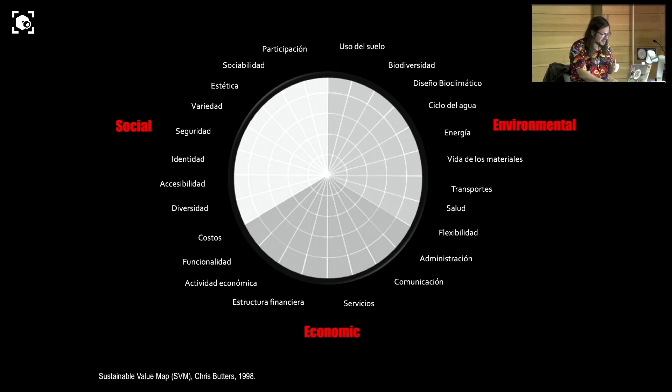As we know, sustainability has been defined for the last 30 years - if you look at a Chris Butters value map from 1998, it's complex, as we know, with three main components: the economical, the social, and the environmental. But I think at the end, what we're trying to seek these days is how we can pursue integrated visions.

And here are some important thinkers. I don't know if you have heard about Janine Benyus and the Biomimicry Institute. She points out 10 rules in nature, considering patterns that are very important. And if we look at how nature has been evolving and how things are interconnected, that's something that actually overlaps many other logics that are important to address.

Or if we go to, for example, Donella Meadows' beautiful book, Thinking in Systems, she talks about 12 leverage points on sustainability. Probably the first steps are to get to know the materials, the processes, the design, but in the end, the intent, the values, the conceptual framework behind a system is what really matters, what we need to understand.

And I really like this phrase by Mr. Fuller, which points out the importance of cooperation without causing harm or disadvantage to anyone. There is an obsession, almost, in many countries to certify sustainability. I don't want to go in depth on that, but there is this amazing initiative, I think based here in the US, about the Living Building Challenge.

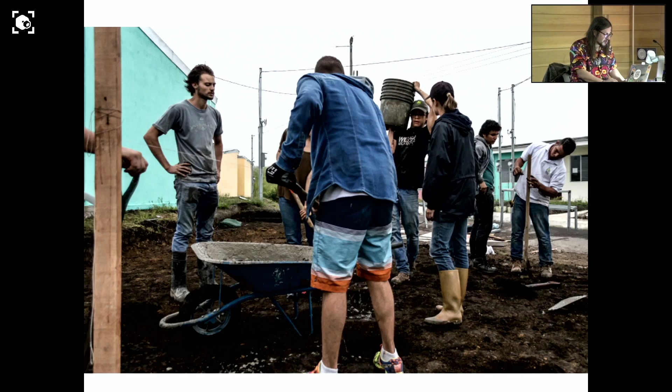Before showing you some examples, I'd like to acknowledge the importance of local intelligence. From my Costa Rican point of view, there are some silly things that happen. For example, there's a huge movement back in Costa Rica about wellness—this is probably good fashion in a way. There's a lot of local effort, people coming from abroad to develop healthy lifestyles, diets, and things.

But we have one of the five blue zones in the world. Have you heard about it? There are only five blue zones. There's a really nice Netflix documentary about it. The people who live in the blue zone in Costa Rica are in a rural area where they have strong social relations. The food they eat is healthy food they grow in their gardens. They do physical exercise, they never retire, they're always close to each other. This is probably one of the reasons they live more than 90 years, and our average life expectancy in Costa Rica is very high.

With a really low income, we have achieved this type of life quality. So it's not about how much you earn or all the things you have—it's about rethinking life quality. So the question is: we're importing all these trends, but are we listening to these populations and learning from their wisdom?

Also, we're talking about circular economies. We want to import many technologies from Germany, from Europe, even from the US context. But have we spoken to the informal settlements? They've been struggling for years, and they have amazing on-site programs on how to recycle and reuse materials. They have a lot of lessons to teach us.

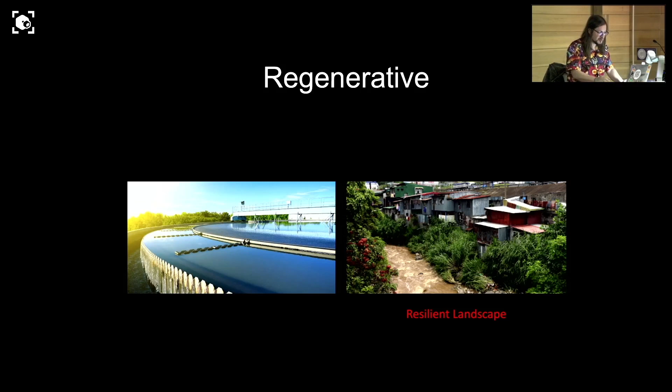Or we want to incorporate this smart cities concept just because it's a business model for somebody else, but probably the most important part is not about smart cities, but smart citizens. I'm not saying I'm against technology, but there's something more important about the human experience and being smart within a social context.

So in practice, I want to show you some examples of what we do.

So there are some projects that I think are milestones for us, and some of them are related with community spaces. Probably one of the first projects, I got contacted by Holcim Foundation to design a manual for nurseries in Costa Rica for low-income communities and rural areas.

So we developed this book that generated guidelines for nurseries. I think the important part was how we could put all the regulations into one single document, making it responsive to our climatic constraints and space use. We came out with this set of guidelines, and we got commissioned to develop some of these projects.

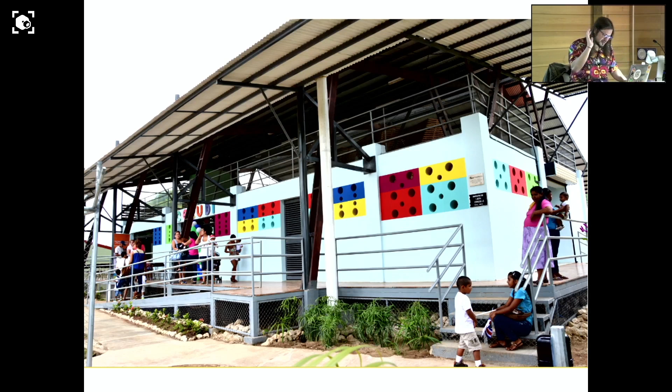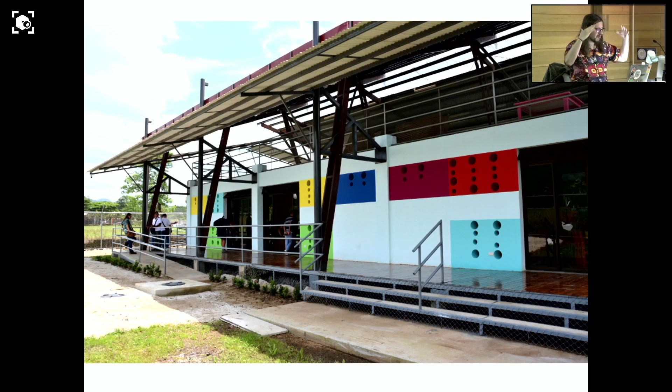This was back probably in 2011, 2010. The idea of these projects was really simple: to have a first level, multi-purpose, interconnected spaces for the nurseries. But on top of it, we have this buffer space, like an elevated roof, that generates a thermal buffer and has a multifunctional space on top of it.

All the internal partitions are movable, so everything can get interconnected for that instance. This project was really important for us because it was our first approach to understand, with the Holcim Foundation and the local government, how these pieces of infrastructure could be multi-use, not only for a nursery, but as an opportunity for different possibilities of spatial program and use.

That's something we tried to address with some of these projects we constructed a few years ago. As you see, they're really simple, just the base, a multifunctional base with this big roof, and that's it.

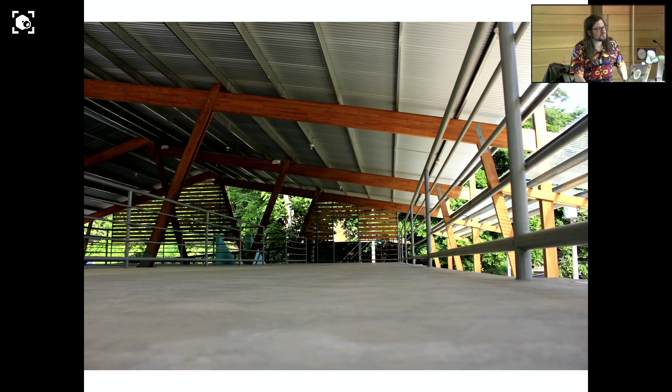I used to have a history professor who said that the history of architecture in the tropics is the history of the roof. So basically, if you have a very well-designed roof, you can put anything you want underneath. More or less, this is the core aspect of it.

After this set of projects, we got really deep into participation. And when I talk about participation, I'm saying it in a broader extent.

Here, there is an experience that I developed in Lowell, Massachusetts with the refugee Cambodian community. Also with some Mexicans in Oaxtepec, Mexican campesinos - farmers - in Oaxtepec, Mexico. And also with some community organized groups.

And when we were in the pandemic, we had to struggle and juggle how we could do participation without being there. So we've explored many formats and many places on how to work this.

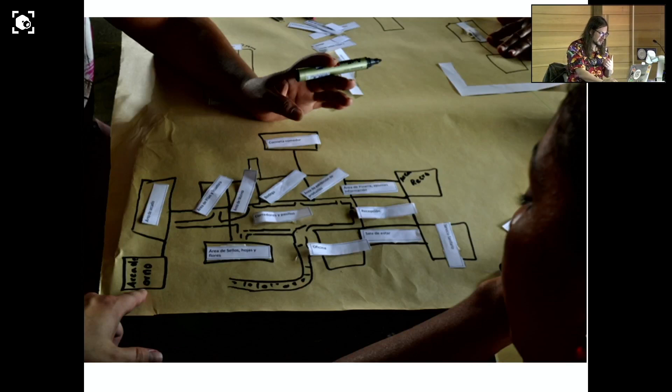I think the important part is how we craft these experiences, not as a recipe, but as a series of moments - how to listen, how to understand on site the communities, listen to their voices, try to raise those voices, have critical conversations about what aspects we need for the particular project we're trying to put together, and then how we can validate these ideas.

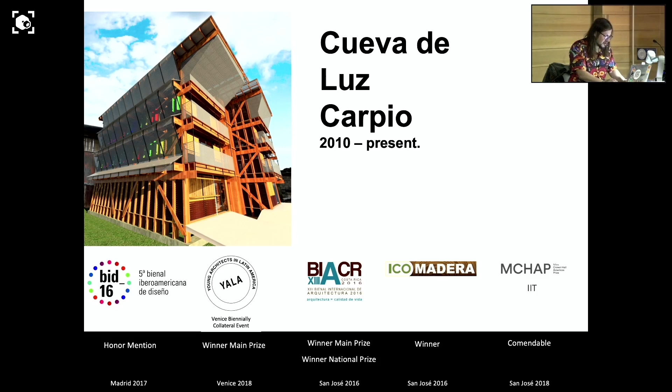This is probably one of our most important projects. It's called Cueva de Luz, in La Carpio. This is located in San Jose's biggest informal settlement. I'm going to show you a short video about it.

Informal settlement - we're speaking about more than 50,000 inhabitants. Almost 13 years ago, we spoke to these two amazing women, Alicia Avilés, who is the community leader, and Maria Estela, the leader of the NGO, which is based on a system of art education for social inclusion.

We spoke to them years ago, knocking on the door - how can we help? How can we be helpful? And they presented to us the necessity of having this community space.

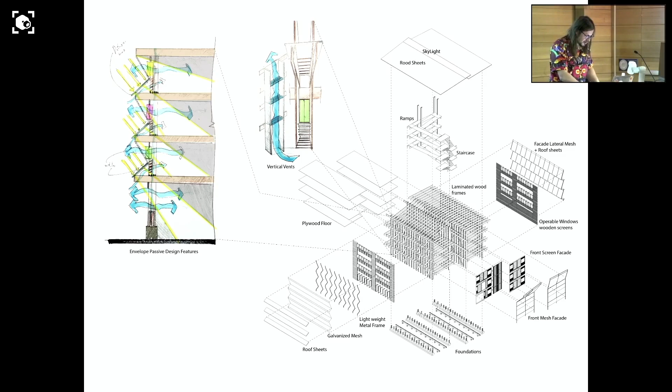And it's a very simple program. It's a four-storey timber construction, the biggest in the region. We first constructed one volume and then the other one because everything was related to a fundraise campaign, so we couldn't do all at once. Here are some images about how to think a piece of infrastructure that could be easily installed in a really complex environment, because there is not much place to maneuver, so we really needed to craft a prefab timber construction. And because it's on an informal settlement, this could easily be dismantled and got rid of. So that was something important.

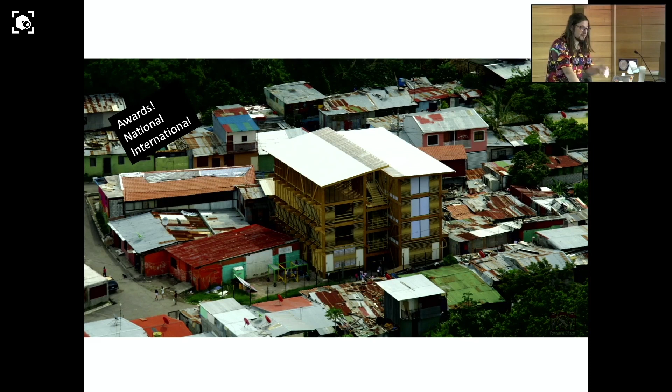As I mentioned, some of these projects, especially this one, has won important awards. When we won the National Biennale of Architecture in Costa Rica, one of the colleagues called the College of Architects and said, hey, what the hell, these guys won the main prize. I mean, this is an illegal project, right? So the College of Architects called us, hey guys, is that true? And of course, I mean, it's in an informal settlement, we don't have permits to do it. So what can we do? We sent them in the afternoon the technical drawings, documents, and in a matter of hours we got it legal, or at least into the College of Architects platform.

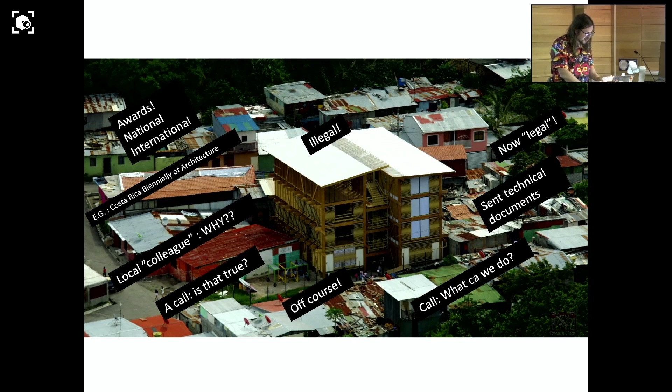And I'm saying this not because I'm promoting illegal architecture. However, it's really important that we as citizens have been calling for urban and social inclusion. La Carpio has been struggling with this necessity of having public spaces for the last 40 years, and nothing happened.

Of course, before doing the project, we do all this stakeholder analysis. We talk to the local municipality, we talk to the College of Architects. We have approval from everybody without signing anything. So it's quite a lie what I just told you, because we have approval from everybody, but nobody wanted to sign the paper because it's an informal settlement. So I think this is even more important, because sometimes if we're really sure this project will be like punta de lanza, like a spearhead for many other things, it's important to do it. Sometimes we have to take those risks in order to show what is possible on site.

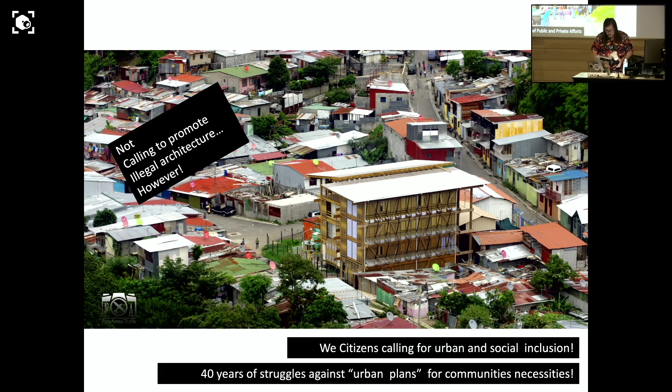And what happened afterwards is that finally the Ministry of Education built a legal school, they built another thing here. Now the Housing Ministry is trying to legalize some of the lands and things like that, because this had so much public attention that it really made a nice impact for the site. So I think these projects are like catalysts for development, but also show the importance of citizen engagement in these processes of building cities. For sure, it's a conciliation of public and private efforts.

Is the mic going? Hello, hello, probando, probably the battery. Should I use the other one? Keep going. Hello, hello, somebody should check the video to see if it's going. But I think it's this one, right? Yeah. Try this one. Oh maybe this one so I can stand up. Hello, hello, hello. Hello, hello. Yeah, hello? Hello, hello. Maybe so, the mic is fine. Okay, the mic is fine, and I think they can hear you, so you can keep going. Can you hear me well in the back? Like this? Yeah, all right, awesome.

Okay, so then another important part of this project is, I mean, we were the architects, but we were also part of seeking solutions to develop the fundraising. So one nice example is we took some of the beams, the laminated timber beams, and brought them to some of the major commercial centers. So people donated and got to sign the beams, and then afterwards they were installed. So in a matter of a couple weekends, I think we fundraised like $60,000 only with this exercise. So it's also nice to see different ways in which we can enhance these processes.

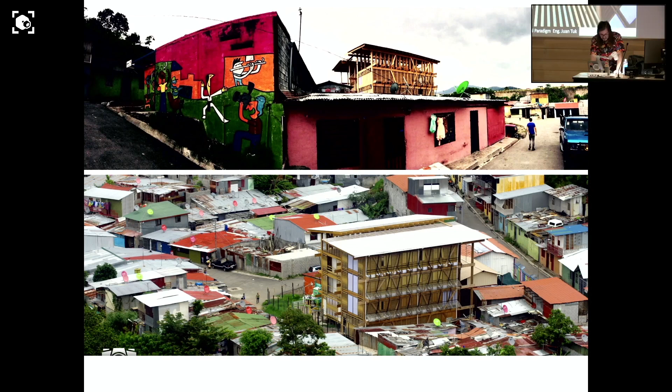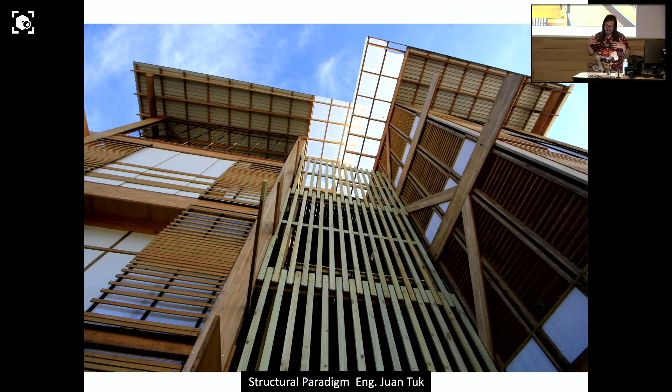As I mentioned, the biggest timber construction in our region, Juan Tuk was the engineer. He's amazing, he's like the legend back home in terms of timber construction. Most of the technology behind this construction is based on bolts. Basically, we don't use any metal connections at all. Everything is based on the bolts and the way we interlock all the timber pieces to generate these spaces.

So everything is as it is. There is nothing, we don't cover anything, we just show the structure as it is. In fact, we thought it was a bit silly but nice, we won the Ibero-American Biennale of Interior Design in Spain, and there is no interior design, it's just the structure, that's it. I think that was very nice to say, because at the end the qualities of the materials are really honest in that direction.

And also because of the open floor plan, we have the ability to have different programs going on. There is a Fab Lab, there is a tailoring entrepreneurship called Entre Costuras. During the pandemic, the Fab Lab and this entrepreneurship worked together to develop certain products for the pandemic response. And there are many music ensembles - jazz, rock, breakdance, you name it. There's quite an important cultural movement in La Carpio due to this program. Of course the project is part of it, but I think in a way this architecture tried to enhance those programs and celebrate them.

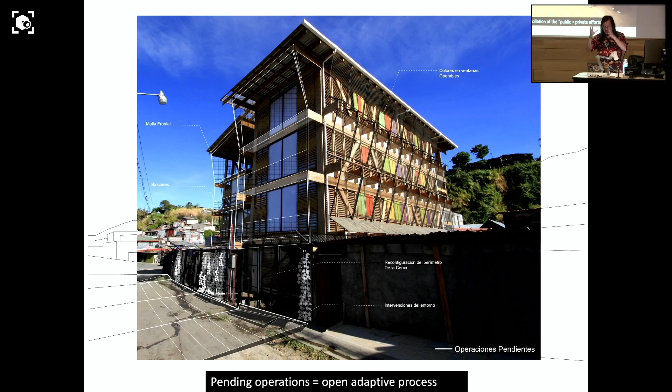At the end what we see is that some of these things are similar, others have different notions on how to engage with the site, with the territory, and at the end this is a set of many relations that articulate efforts, and at some point they can even work together in that regard.

Also thinking about other scales in La Carpio, there's this ongoing initiative that is strongly related. La Carpio is like a big island and it has two rivers. What happens with the informal settlement in that regard is there's a big pressure on the rivers itself. When you go on site, here's La Cueva de Luz, here are some houses, and then you have the cliff and the river over there.

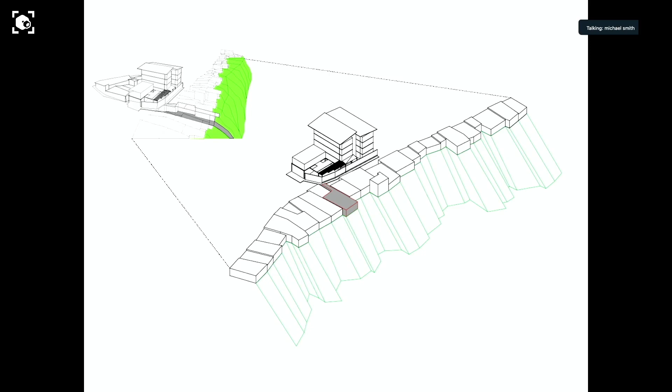And then we wanted to talk with the families about what would happen if one of the houses could be moved out of there temporarily, so we can open up space, generate some density, open up spaces, deal with a regenerative landscape, water treatment, and renewable resources.

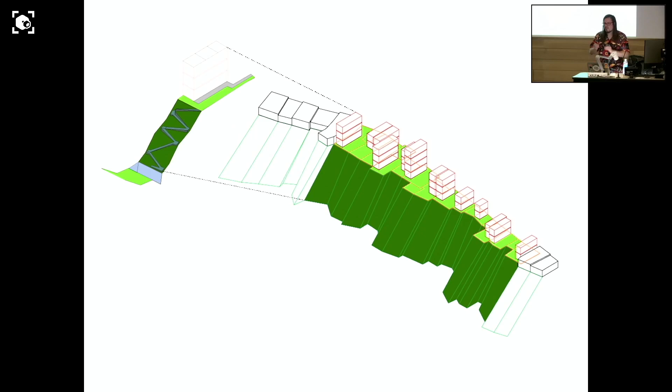And what happens if we multiply that action along that border? That's something we're further discussing. This is an ongoing thing where we're currently speaking with the community and the local government to see the possibility of how we can actually have different systems going on between the two rivers.

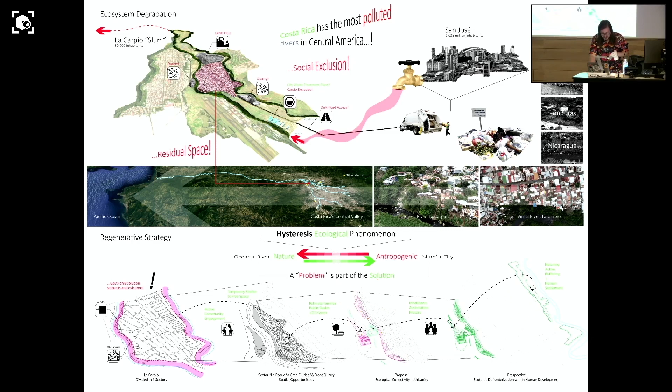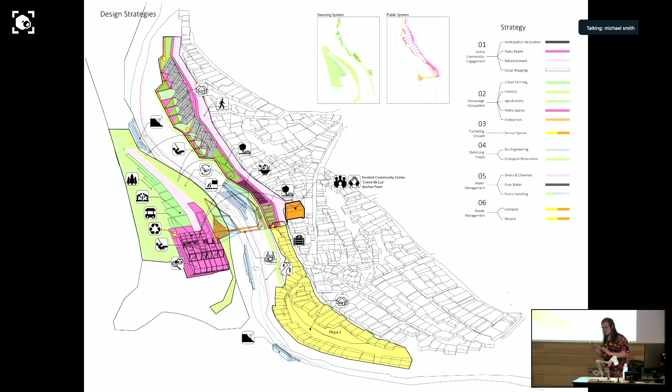We can have a nature system and a public system of spaces that buffers that relationship, generates density, and opens up the spaces, because what we have in most informal settlements in Central America is a lack of space for the public realm. This is really important to address and incorporate.

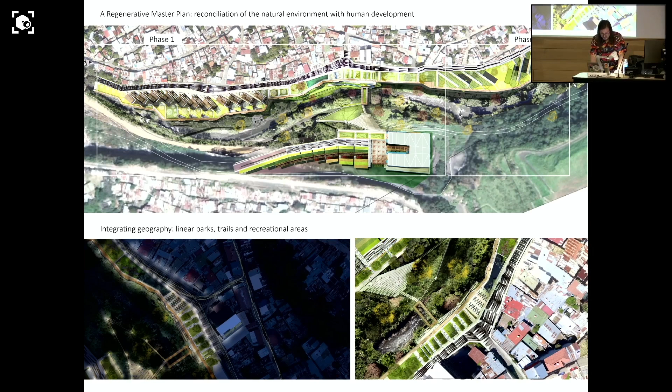Regenerative technologies for landscaping, how to deal with rainwater, with waste management, wastewater or gray water. These are some images about these discussions and how to generate public spaces, parks, public gardens, which is something we're still discussing.

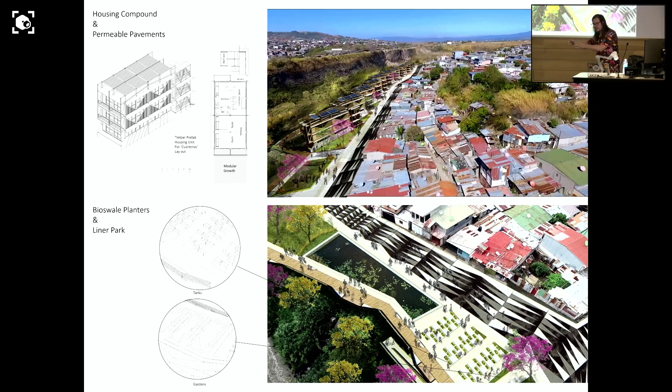I think the important part of these projects, even though they could be utopian to some extent, is that at least we have built Cueva de Luz. So there is a milestone, a project that actually worked, and the community acknowledged its importance, which led us to have other meaningful conversations on site.

This other project is being built in an indigenous community, and I think one of the key aspects is the production line. If you go to the government and they have to do a public space, they just want to go from A to B the cheapest and simplest way. They don't want to waste time, money, or resources on the quality of the design.

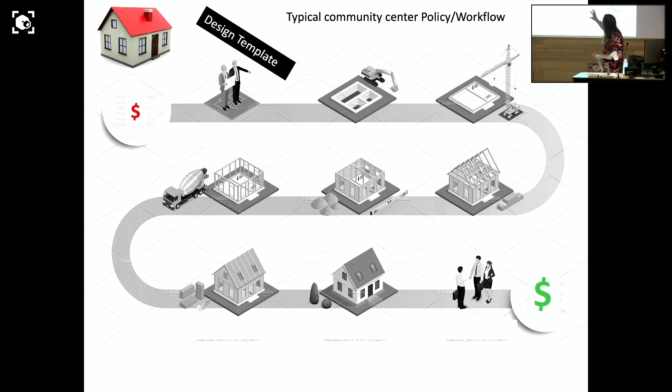But in this case, at least they gave us the chance to do participatory design processes, not using a template to develop a community center, but going on site and showing that the community can be part of the many parts of the process, and that really made a difference.

With the same investment, we could double the size of the project, and of course we can double the quality, as we call it.

Another project I wanted to share is Espacios de Paz. We worked on it in 2015 in Venezuela. They invited different collectives from Latin America to work with local communities. Venezuela has quite harsh conditions to work in, and we got the chance to work with almost 80 representatives from the community to make a retrofit or intervention in this big communal facility.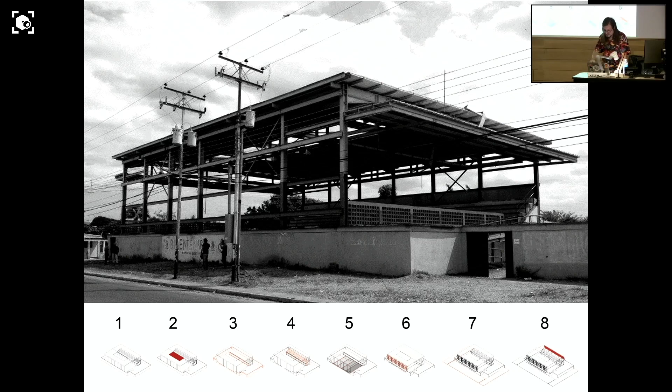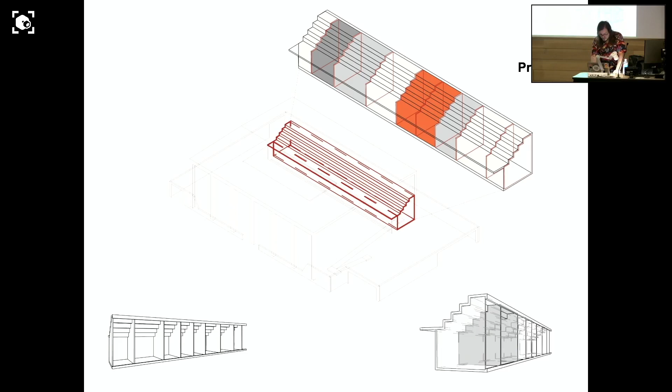The set of interventions was based on the idea that this project was nobody's land, basically because of this huge Berlin Wall they had around it. So what we wanted to do first was get rid of that wall, also use the bench to have more program underneath, and not use the whole space for a single function like soccer, but allow different activities at the same time. Those were some of the core concepts for the project.

We presented these ideas to the community in a matter of hours to show them the possibilities of design we wanted to address, and then we executed. This project was all done in 6 weeks. It was truly a challenge: how to recycle with local materials, get the community on board to design, and also to construct the process.

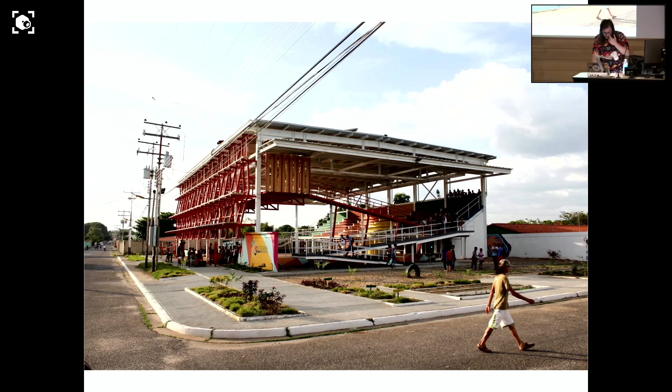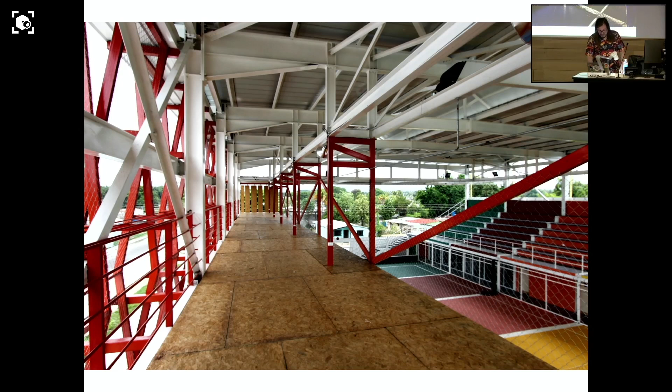As you see, these are very simple interventions to make this space really public, available, and open on site. What I love about these pictures is that they were taken by the community from their social media, so it's nice to see these aren't crafted images from a photographer, but images from daily life showing how people were able to use this project.

From Espacios de Paz, I'd say this was really successful to some extent because it was really simple and it really tackled the necessities that the community pointed us to in that moment.

Another project we're developing currently is in Guatemala. Guatemala has the biggest informal settlement in Central America, so we went to Guatemala and created this workshop with a local office called Para Todos, and did a deep dive in Guatemala.

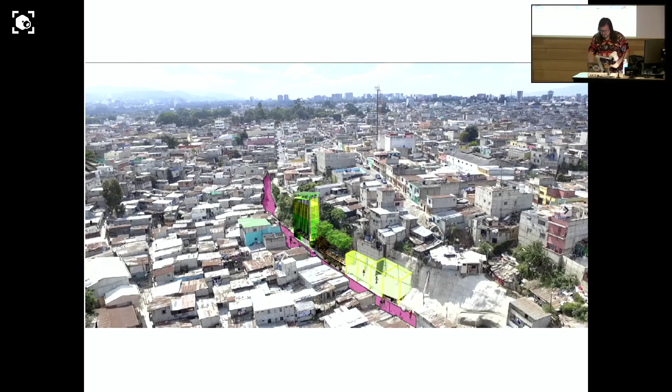I told Dennis for today, I hope this is not too boring for you guys, but I tried to put more of our recent projects, and these ones I'm going to show to you. This is part of our recent, currently ongoing projects. This is called Mercado Ciudadano, like the Citizens Market, in Moravia, which is the town I live.

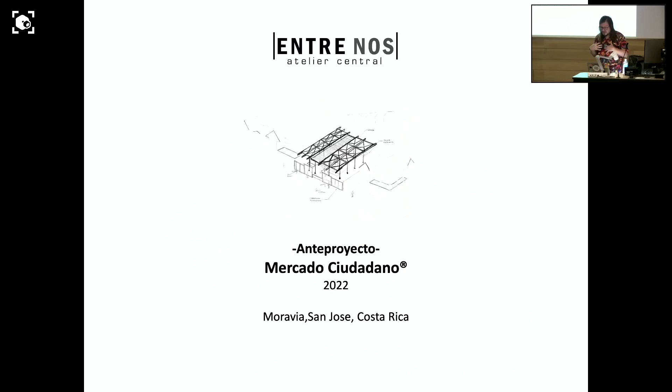We have this challenge of putting, this is a parking lot in between two historical buildings. So the mayor told us, is it possible that we can work and think something that may happen there? So we came out with the idea: okay, they still need a parking lot, but the parking lot is only necessary for certain hours in the day.

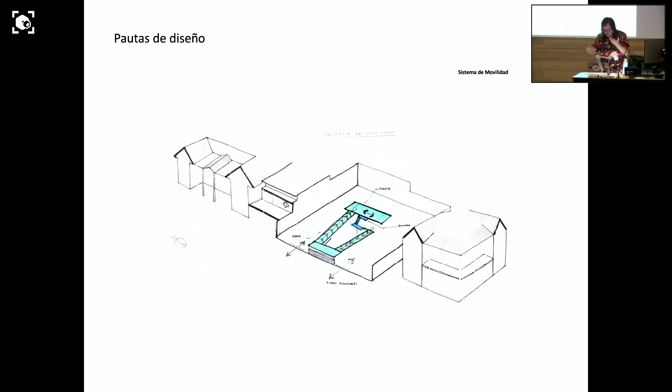So what happens if we generate these platforms in which also we can incorporate, if possible, some green spaces? These platforms are integrated with a very easy way to navigate them into another level, and to generate this openness in the main facade of the parking lot, with these big umbrellas to provide shading. This project is currently being done on the technical drawings, the blueprints, and it's probably going to be built early next year.

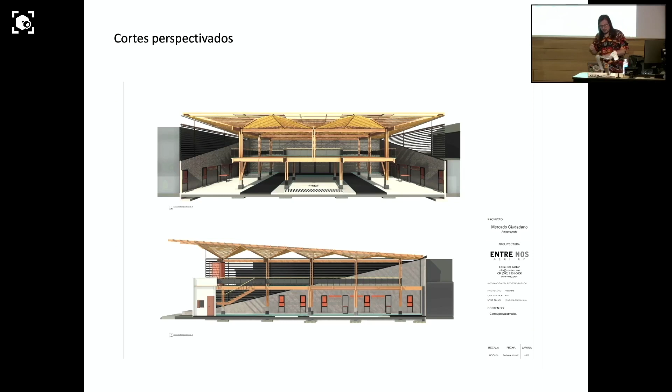And what I like about what we came out collectively is a full NLT structure, nail laminated timber, with rammed earth. So we're currently working on having this big canopy of timber with these walls of rammed earth. We saw that this is a great opportunity to show the community that there are other ways to do spaces, to craft spaces with more sustainable and alternative materials.

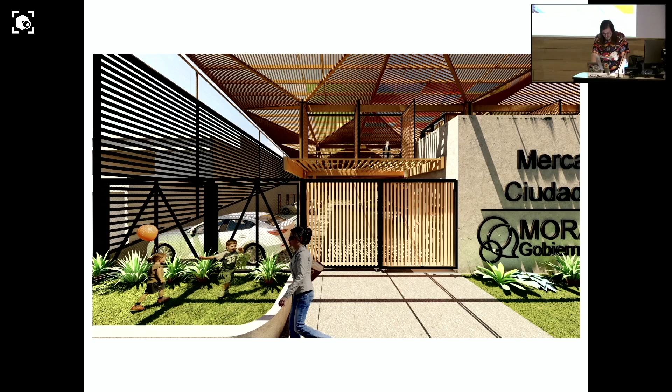So this is a project we're really pushing forward because it represents, in many ways, other possibilities to deal with public spaces, understanding the notion that we shouldn't fix everything for only a particular use, but have the possibility of many uses and many options for the citizens to engage with this type of common space.

Another project I'm currently working on, in a very beautiful location in Costa Rica: this is Roberto de la Osa, he's the community leader in Santa Teresa. This is one of the premium beaches in our country, but there is gentrification here because there are all these big names from abroad who come and buy the land, and there is a displacement of the local community. So with the local community and the on-site organizations, we're working on developing this community center.

You will see some of these images of the actual condition. There is a lot of investment for developing tourism, but not for the community itself. This is what we have right now. It's not an inviting place, it's really spoiled in many ways.

So we were thinking together, what happens if we develop this hub? It's a two-story building made out of timber as well, that has a fully wide open space on the first floor with a cafeteria, and deployable partitions that open up into a gathering area where you can have different activities, especially kinesthetic activities. In back of it, you can have a ramp that gets you to the next level.

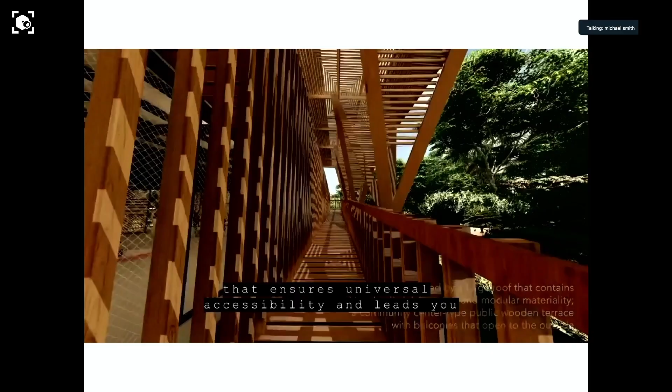This is a project that is really important for our practice, with the concern I told you about today about the importance of using local materials, but also acknowledging local traditions and the way vernacular architecture in rural areas creates a climatic responsive architecture.

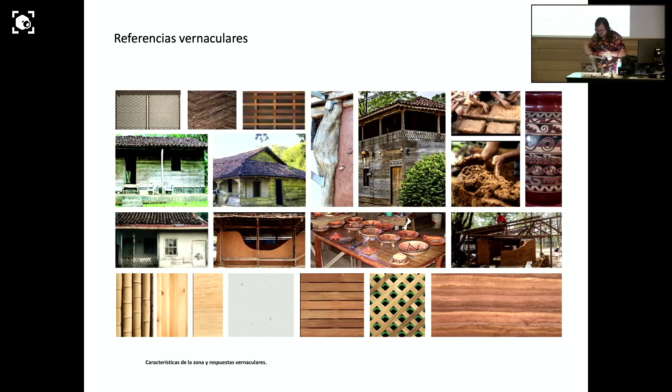We did some sketches and models, and what I showed you before were the previous renderings, and some ongoing public spaces we're doing right now.

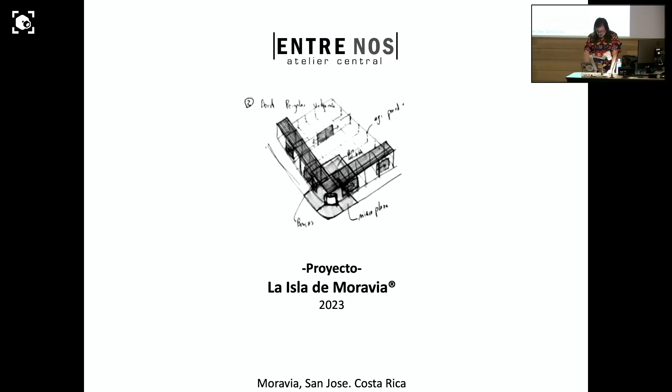I think this is probably one of the most important conversations I want to have in Costa Rica for the next 5 or 10 years. I really wanted to share this project with you because this is a public park, and we did it during the pandemic.

The US Embassy sponsored the participatory design process. How can we do participation in a pandemic environment? Everybody was locked in their homes. I don't know if you've had the chance to develop participatory design during the pandemic.

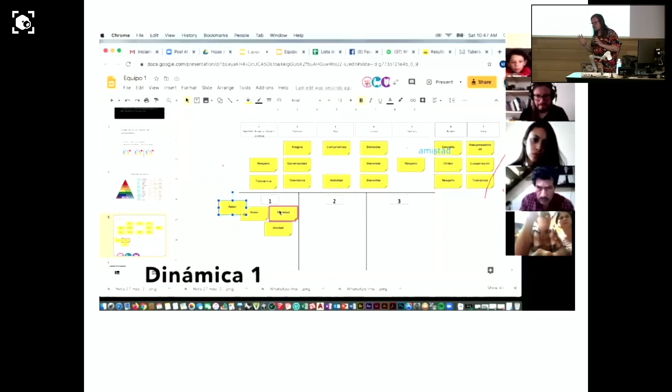It was truly a challenge. It was hard, but it also unfolded other ways to communicate and to have evidence of the processes. So we invented doing post-its online.

How can we talk about the values of the project? How can we talk about the program? Before these exercises, we had a capacitation video so that we were sure the community knew how to use these tools, that they were really easy, but we needed to make sure they were able to use them.

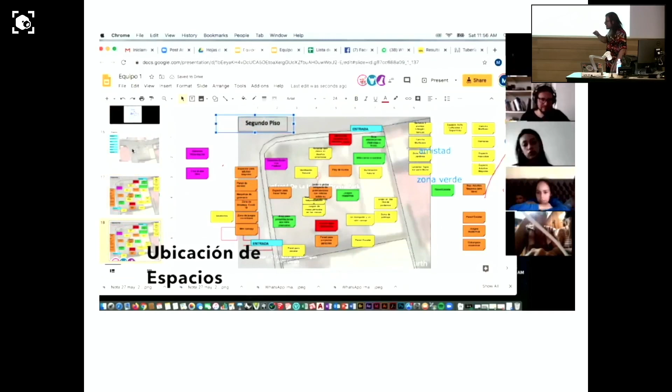We learned a lot about these processes. Something that happens with these projects, when we were on site trying to put that program into place, there was the same problem I find in many communities in Costa Rica, and I see it in other countries in Latin America. I don't know if this is an issue in the US context, but everybody has this sense of security just by putting up borders.

If you enclose a public space, that's going to be secure. That's something most mayors in Costa Rica argue a lot, saying we have to enclose the space because otherwise people are going to come in and spoil the place. So we don't have co-responsibilities, and to some extent, it's just a poor notion of doing security.

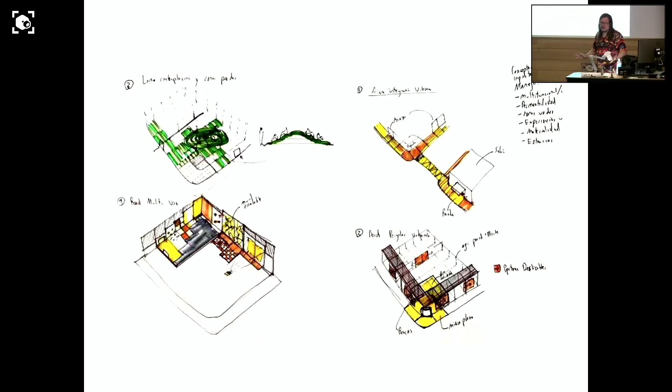What we tried to do with this project—if we proposed to just get rid of all the fences, they would say no for sure. There's no way they would do it. But what we tried to explore here...

Was how about the borders? We have different levels of openness, so the community has the ability to open and close the space as they wish. I know this is probably not the right solution, but at least it's a transition toward the right solution, because the notion of security is people seeing each other, basically. We don't need such a big investment in infrastructure.

What we tried to do here was to have, for example, these pivot movable partitions that when they move, generate a bench. So we negotiate the boundary for that instance.

On the other boundary at the back, we thought, how about we make a vertical playground for the kids? So it's not a fence, but a playable fence to some extent. This is something we wanted to incorporate into the design because it opens important conversations.

Even the community was a bit reluctant at first—would that really work? This is recently built, but the response so far has been, yeah, actually, why not? Why don't we open the spaces? I know this looks like common sense, but in our context, I think this is generating important questions about the public realm and many ways to deal with it. It's not black or white—we should think about transitions.

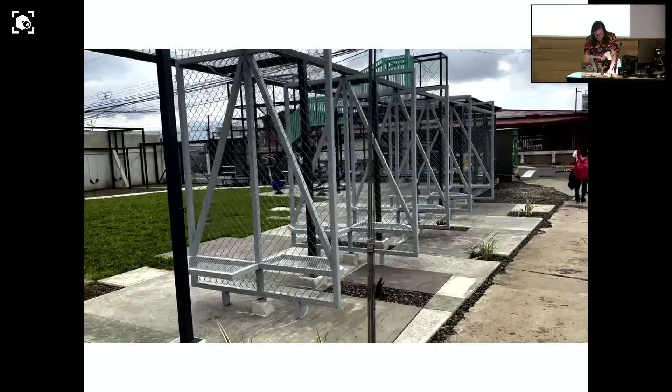We are really keen about seeing the evolution of how people are going to react to the quality of these spaces. These are some images, really recent. Actually, these pictures have been taken by my phone. This is not a produced picture at all.

But I wanted to show you how this affects the relationship with this neighborhood, which is a tight, intense neighborhood. We have seen very important engagement, especially from the kids, using these spaces.

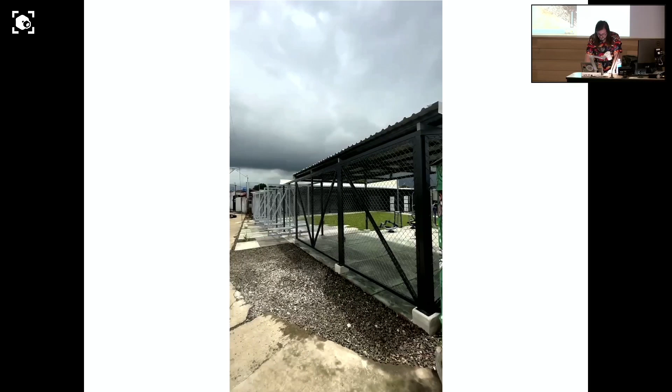What I wanted to show you is that sometimes these prototypes, like the project you saw in La Carpio, the big community center, and this one, raise important questions. Sometimes we have to take the risk and see if this is part of the solution. Hopefully it's not making the problem bigger, but sometimes it's necessary to generate these physical questions to understand if this is what we want, the concern we want to raise in terms of relation with the public realm, with public spaces, and so on and so forth.

In this case, everything is steel, and it was easily crafted with local technology. This is the community association. When we developed this project, there was another association, and when they got this project, they were a bit reluctant. They didn't want it too much, but we went through the process, talked about it, and now they embrace it, and we'll see how this process unfolds.

This other project I'm really excited about is called Las Gradas de Copey. It's another project in this stripe, a vertical stripe, and it's a connection because of the slope. You cannot put a ramp, and of course an electrical staircase would be too expensive.

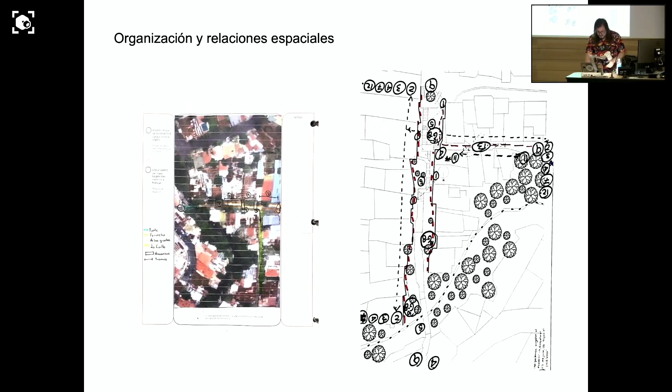So we talked to the community to understand how we can enhance that public space. There are immigrants from Nicaragua in that area, and the quality of the public space is really bad. We talked locally with the community and the municipality to see what are the possibilities and challenges of dealing with these spaces, and we presented the ideas we crafted, identifying certain spaces that are really important to address.

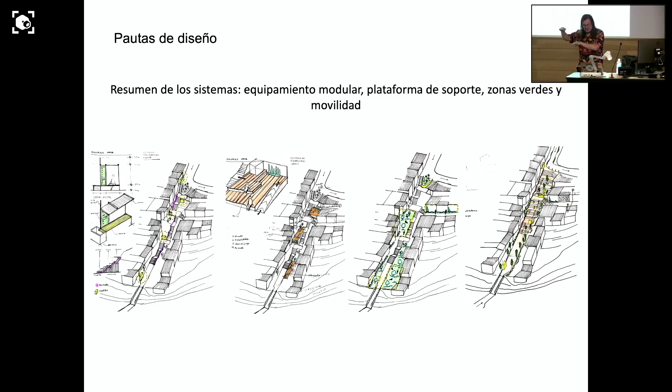At the end, what we came out with was a series of systems related to public furniture, terraces, green spaces, and the staircase, with a certain sequence so it wouldn't be too harsh to navigate the place. Here are some of the technical drawings. This is about to be built in a couple of months—I think 1.5 months will be the construction starting.

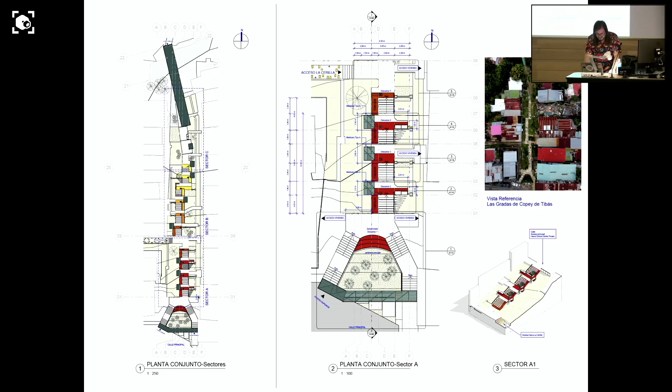Here what we identified is to have a set of staircases with a slider for the kids that goes in a different rhythm and motion, with different platforms to highlight the landscape connection with the site to the surroundings. This place is really something else, and the municipality is pushing forward these ideas because this project may connect to the different levels and places on site.

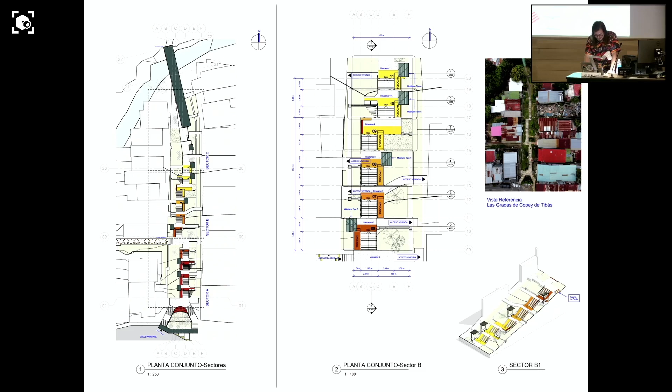Let me see how I'm doing on time. Oh my God, 50 minutes. Hold on, I think I'm going to jump quickly to another part because I told you it's going to be too long. Jesus, hold on. I'm so sorry, I didn't want to take too much of your time, so I'm going to move quickly to this other project. Jesus, hold on, because we already have 50 minutes. Jeez.

Okay, I want to switch gears and talk about what we do in academia, because I showed you some practice examples, and as I mentioned, it's been years of doing design and build projects since 2005. These projects have been developed in many communities, scales, and different associations, and over a matter of years we mapped the importance of the relationship between academia, practice, and expertise, and how we have projects of different scales—some that generate income, and some that don't.

I'm saying this because when you're about to graduate, you don't know what the hell you're going to do with your degree, right? And whether you're going to have work or not. So this is important to understand: it doesn't matter the scale, but what really matters are the values and the purpose—why you study architecture, and what is the impact of the things you like and are passionate about.

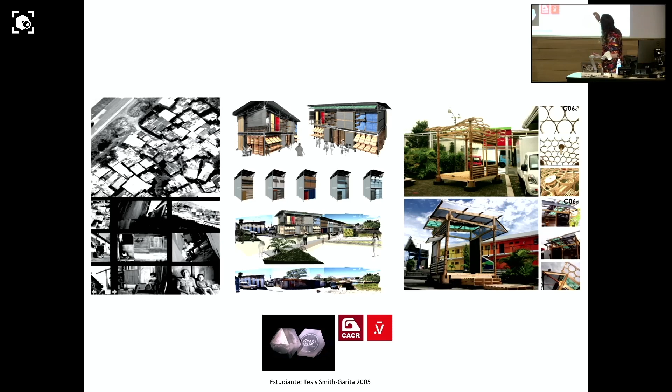So in a way, mapping all these exercises and the way they're interconnected, they unfold many relations. Projects like this, like my graduation project that won the Archiprix in China back in the days, the first project we did in the university related to a community center. Then with my students, we developed other initiatives to work on one-on-one scale projects, working in different informal settlements with different community organizations, with Techo para mi País, for example, a big NGO in South America.

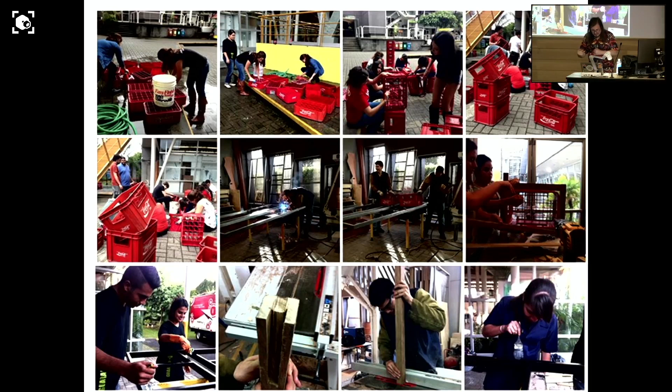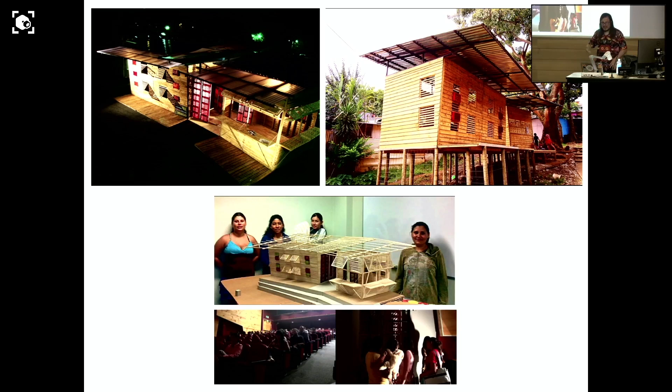We work on developing and crafting these projects with our own workshop back in San Jose. So we build a project on the parking lot, we disassemble it, and we bring it back to the community. And we got the community leaders involved in the fundraising campaigns. Many of these exercises have been really important to us.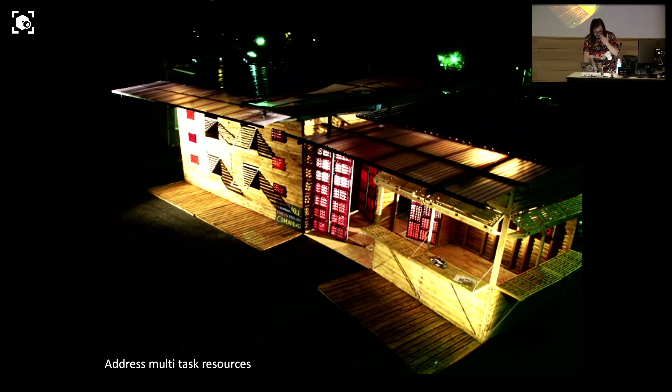We developed this set of exercises that have proven to us the importance of being proximate, of collaborating alongside with the communities, and doing many types of interventions, not only in one semester. We work with these communities for at least one or two years, and we develop trust, and we use this great excuse with architecture to generate human relationships, to explore placemaking, and to see these projects actually performing, and how this is a joint effort, a transformative experience for many people in the places that we work.

And of course, all the lessons you can learn on site on how to build, how to craft, how can you learn from the community itself. They really have knowledge and wisdom on how to construct things as well. So this is something very important to us.

The reason I wanted to rush a little bit, and I'm about to finish, is because I wanted to share with you this platform. We have what is called Justicia Espacial, or spatialjustice.com, justiciaespacial.com. This is a really important effort that we have done together with a collective of architects, mostly from Latin America. We have won important prizes in a couple of biennales recently.

The importance of this platform is that we have developed an online community in which we have developed academic projects with other universities, strategic relations with NGOs, with the government. We also have a series of public events, more than 70 nowadays, with amazing speakers, free online that you can see—right now we have them recorded—and also a set of papers that you can download for free from many experiences in Latin America from other collectives.

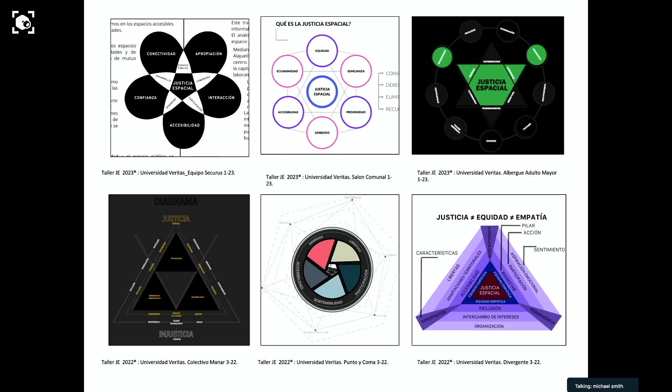So these models help us to have a filter on how we want to understand spatial justice, and how these models are driven towards values. And these values help us to understand the space, to extract critical spatial patterns of these spaces, and how we can represent those patterns from a technical point of view.

Because when you research spatial justice, most of the information comes from geography, sociology, anthropology. But there is a dearth of architecture in a technical dimension to speak about it. And I think that's a challenge we're trying to push with our students: how can we talk about spatial justice with the architectural tools we have and the spatial design we want to achieve.

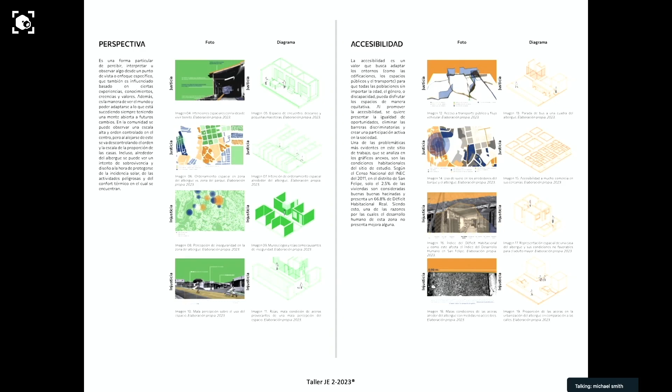And of course, this is strongly related to participation and to the engagement tools that we develop to work with the communities. This type of interface is something that we try to further explore in detail, and how we can actually generate that engagement with the communities we are working on.

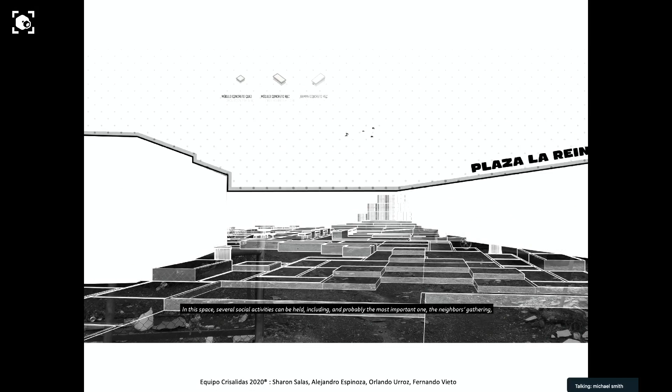How can we present these projects and generate a narrative that shows the different strategies on site, so they're easy to visualize and explain to the communities we work with? For that, we work with physical hand sketching, and at the end of these processes, we present it on site or in the School of Architecture to the communities, and we invite them to discuss the project.

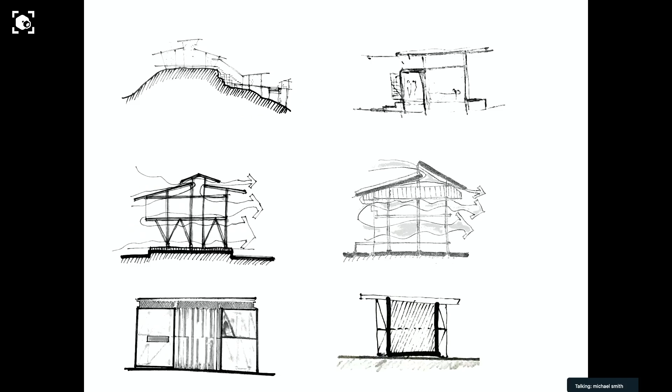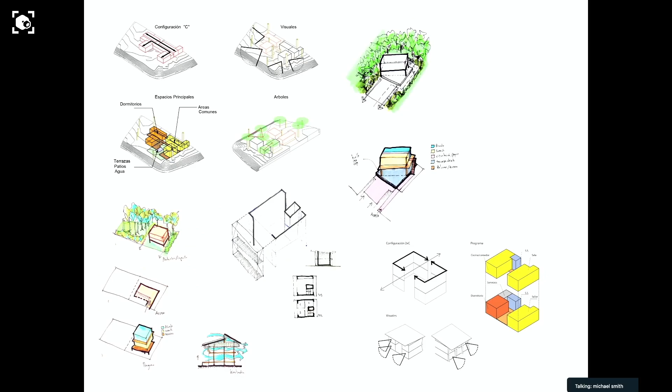I promise I'm about to finish. These are some examples of our practice, which I wanted to show to highlight the importance that we're still working first with hand sketching and physical models. We go on site and do all the climatic analysis in depth to understand the environmental features, how we deal with ventilation, solar radiation, and all the design guidelines that inform the design process.

All these models we craft, we celebrate in our practice, and we even have our way to document them, and we really enjoy this part. Then going into the digital environment, here's a couple of examples. This is what we call the treehouse, a project we did with a client who wanted a close relationship with the back forest they have, with a very simple program: a two-story compact unit, like a platform with cross ventilation.

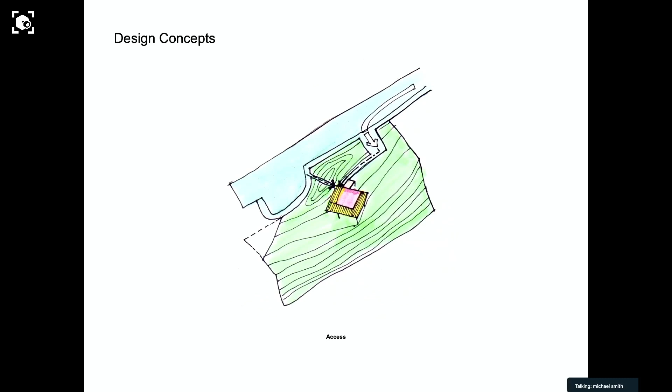We did some hand sketching, the physical model, and this is the site, a really amazing place. I'm working right now on different housing projects, and this one in particular, well, it's a shame that this part is spoiled like this, but that was part of the developer.

What they have on the back is a beautiful forest, and this couple really wanted to have a close relation with that forest. This is part of the asset of the house, having this screen with the platforms and terraces, fully cross-ventilated and in close relation with the landscape, with the openness and porosity of the envelope, and the connection with the site.

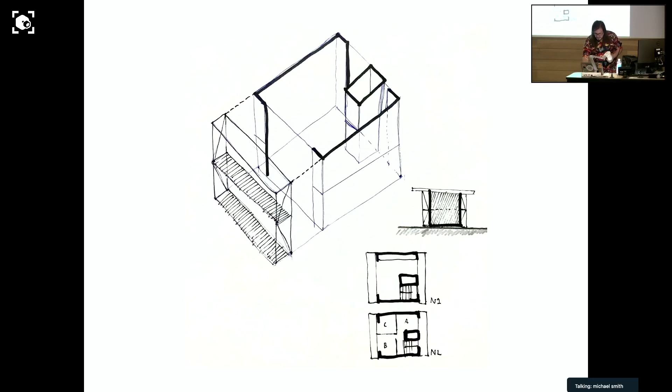This other small project we recently built is just something simple, a box with two transitional spaces. As you see in this video, it's a very simple project, just a couple of screens that unfold and fold to present the spatial qualities of the materials.

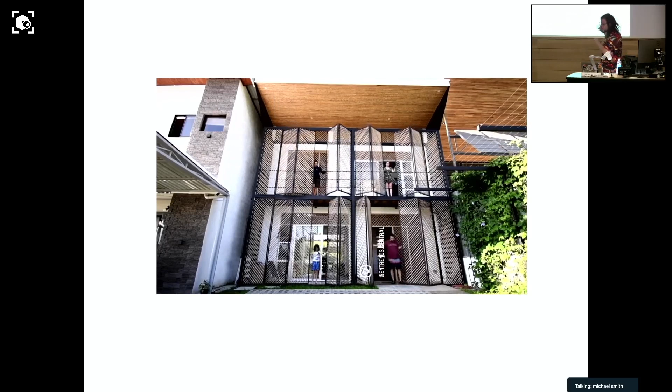Here you can see a video, and that's my son, by the way. This material we call caña brava, similar to bamboo, and we have it in the front part of the building and also in the back part.

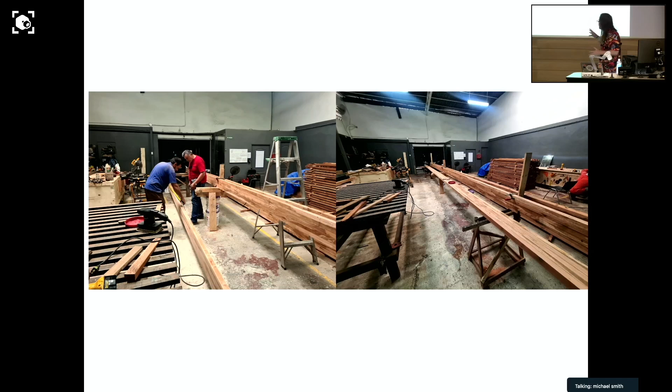Last but not least, I'd like to show you the NLT technology - I told this to Dennis. This is a local entrepreneurship we're having right now, and it's amazing because we are laminating local timber, any kind of timber, with some specific nails we use, and we've been making huge, big beams for several projects.

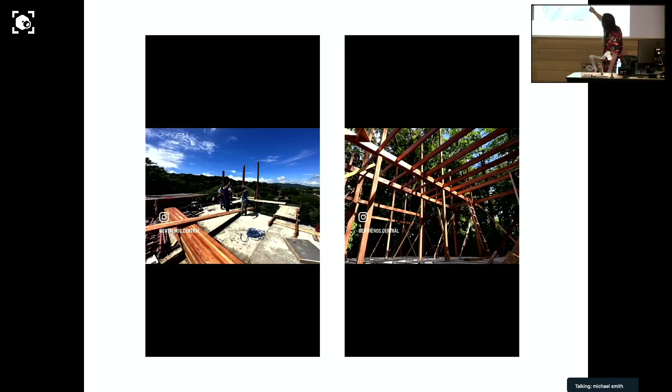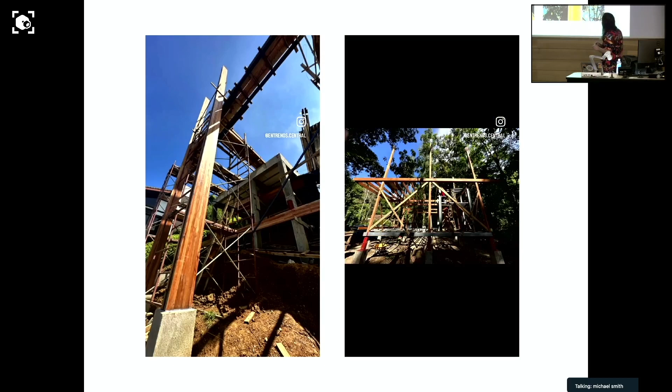This one, for example, on your right, is a project I'm currently building on the Caribbean side, using timber - that's another house that's bigger than this one. It's amazing how, with very easy, local, accessible technology, we have achieved this level of structures, really easy to implement and prefabricate in the construction process.

I learn a lot from them, and it's so important to have a good vibe when you build projects with the construction workers, with the crew. We really like to acknowledge them, because some of them don't even finish high school, and for them to have a certificate from the professionals that celebrates their participation in the project is very important for them, but also for us. These are some of the missing links or little details we often forget, but they're probably the most important part of the project, an amazing part of the team as well.

Thank you very much. Sorry for rushing you too much.